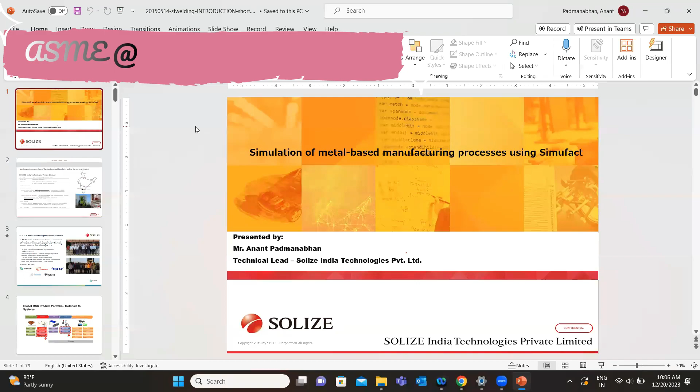Once again, welcome to the session and very good morning to all. My name is Anant Padmanabhan and I'm handling the technical team at Solize India Technologies. Our topic of today's discussion would be simulation of metal-based manufacturing processes using the software called Simufact.

To start with, I will give a brief introduction about the company Solize India Technologies, followed by Simufact, and then we'll move into the software related discussion. So basically, what is Solize India Technologies? We are services and solution providers in CAD solutions as well as CAE solutions all over the country.

If you talk about CAD or PLM technology distribution, we are a leading partner with Dassault Systems India. If you know CATIA or 3D Experience technologies, we are the solution providers for these CAD and PLM related technologies. Coming to CAE technology distribution, we are the partner with MSC Software, which right now is under the company called Hexagon, and VA Grade.

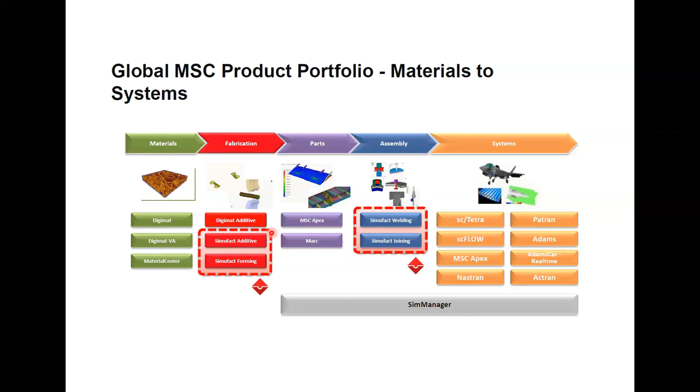We'll start with the introduction to the Simufact software, which is mainly used for metal-based manufacturing solutions, an end-to-end solution for metal-based manufacturing simulation. It can be in the forming or forging domain, additive manufacturing domain, or joining processes like welding, and so on and so forth.

So how did the Simufact software come into the picture for manufacturing simulation? Simufact is basically a German based solution, a German company. As the word, Simufact stands for simulating manufacturing, these two words. It is basically supporting metal-based manufacturing processes, and it is a very manufacturing-oriented process simulation.

It was headquartered in Hamburg, Germany, where the development of this solution started. Technology-wise, it is using the well-known solvers like MSC Marc and MSC Dytran solvers, which work in the back end behind Simufact for solving complex multi-physics as well as multi-structural problems.

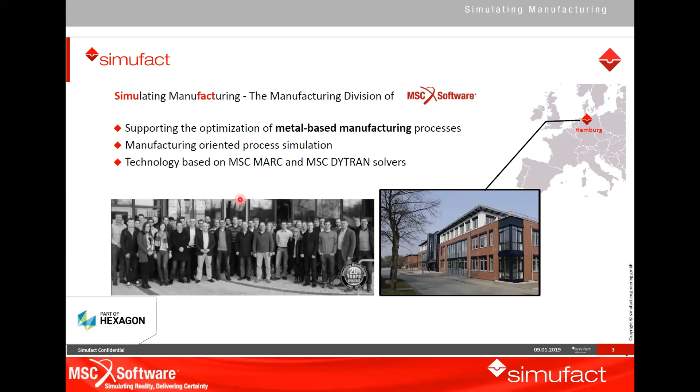Simufact was founded in 1995, and as I explained, it was headquartered in Germany, and it offers solutions for a large number of manufacturing processes in the metalworking industry. It provides software products and services for optimization of manufacturing techniques by means of process simulation. In 2015, it got acquired by the MSC Software company, which is part of Hexagon.

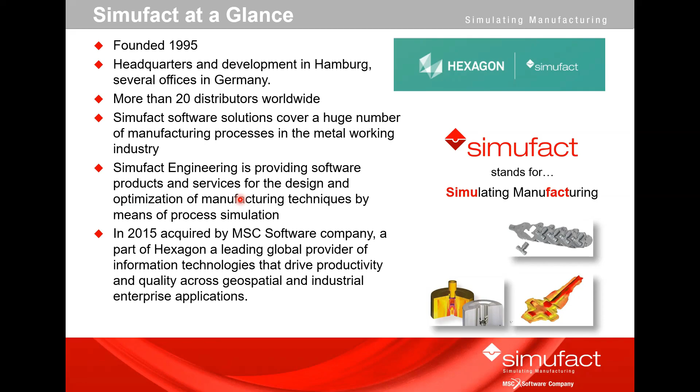Hexagon is a global provider of information technologies that drive productivity and quality across geospatial and industrial enterprise applications. So all these things come under the solution provider called Hexagon, which handles these solutions. We come under the Manufacturing Intelligence division of Hexagon. Simufact is a part of this technology provider.

At a glance, when we look at the Simufact product or solution provider, we broadly classify our solutions into forming domain, additive manufacturing domain, and welding domain.

In forming domain, what are the different analyses or processes we can perform? We can perform cold forming, hot forging, sheet metal forming, or any rolling processes, ring rolling processes. It can be pressure welding or heat treatment processes. So all these processes we'll be able to perform under the module called Simufact Forming.

Coming to welding, we can do arc welding processes, laser beam welding processes, electron beam welding, and brazing simulations, as well as for automotive customers, resistance spot welding simulations. And there is direct energy deposition, DED process, which is a deposition method based on arc or laser based deposition processes.

So this is some kind of additive manufacturing process, but we use the welding technology to perform additive manufacturing. It can be arc based or laser based, like cladding, laser based cladding, or arc based deposition process, which they call the DED process, direct energy deposition.

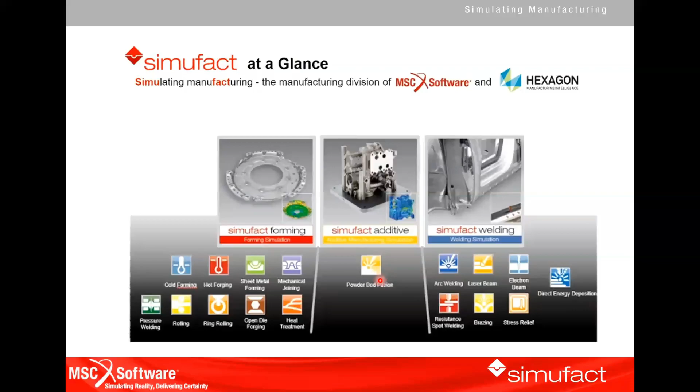So this is Simufact at a glance. Now let us deep dive into Simufact further, like what is Simufact welding, what is Simufact forming, and what is Simufact additive actually. So today we'll be covering the welding aspects followed by the forming, and tomorrow we'll be having a session on Simufact additive manufacturing.

So let me start with an overview of Simufact welding, and we shall see some case studies, followed by a demo of the software. So we'll see how it goes actually.

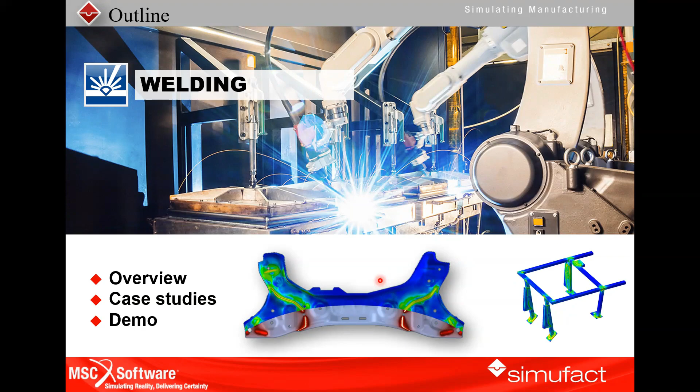Coming to the overview, like how Simufact welding came into the picture, or why such a software or technology is required in the manufacturing industries - the idea was born from 5 of these top OEMs like BMW, Audi, and other OEMs. They wanted a solution to make the simulation process much easier for them. Basically these are all FE related technologies, finite element based technologies, but how can we make the finite element technology easy for the user - someone who might be a design person or a shop floor person working in the industry, who might not be aware of finite element technologies. So that was the idea of starting a simulation software for manufacturing people.

So in the sense, the software should be innovative and it should be user friendly too. That is the main aspect. Any person working in the industry should be able to understand and should be able to easily set up his process in the software and then find solutions for his problems actually. Okay, that was the idea.

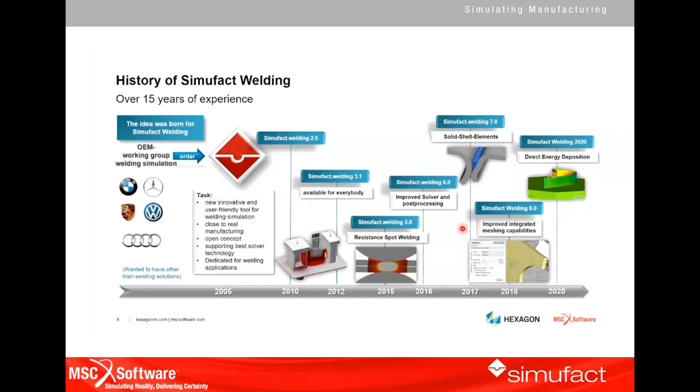Then over the years, it started in 2005. Over the years it started evolving and new technologies started coming into the picture, like they started with arc welding, laser beam welding, then they started introducing resistance spot welding technology, followed by some improved GUI based applications to the software, so the user will get a direct feel - if the GUI based application is there, we'll be able to easily set up our models inside the user interface. Then direct energy deposition, when deposition technologies or additive manufacturing came into the picture, they started developing this kind of technology into the software actually. So this is the basic overview of Simufact welding, how it came into the picture.

Now coming to manufacturing, what are the problems mainly faced by manufacturers? It can be joining technologies or forming technologies - for example, to design and optimize the welding strategy and how to reduce weld distortions actually. So in industries they might face these problems on a daily basis. So how to overcome these kind of problems actually?

It can be by identifying the best welding process, or optimizing our fixtures or the clamping concepts - it can be geometry based or time dependent force, or time based release, force or stiffness aspects which come into the clampings. Or optimize the order of the welding path - welding trajectories or welding path based on the sequence of welding, how it can affect our distortions actually. And it can be optimizing the heat source parameters.

So all these aspects come into the picture when we are doing a welding process, and how we can overcome welding distortions and other related problems by optimizing these parameters, to calculate residual stresses on the components. Residual stresses can be a major issue when we are talking about welding processes, and understanding how weld

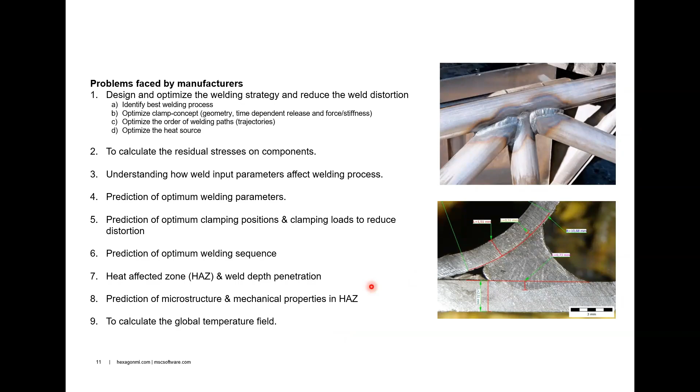So 8 good reasons to employ Simufact Welding. First would be to identify any critical distortions in the components or in the assemblies, to investigate clamp tools, to investigate the welding directions and welding sequence, to investigate the influence of unclamping and weld distortions and residual stresses.

And development of heat affected zone, and then planning of welding processes. Then all these aspects, if we are dealing with any of these kind of aspects, we can employ software like Simufact Welding for our applications.

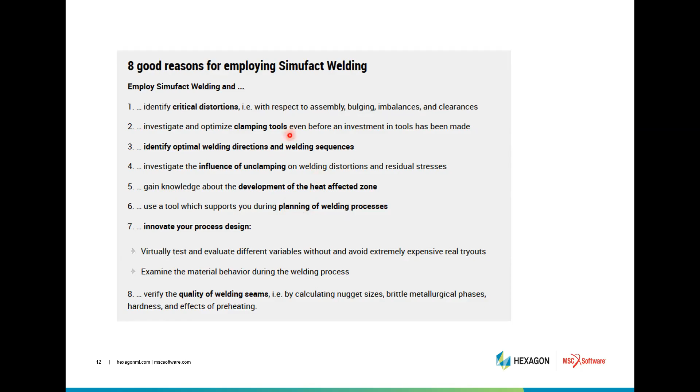So what is the basic agenda? It can be, you can say, saving time and money by testing our processes in a virtual environment. So basically in the industries, they spend a lot of effort in testing and trial and error methods to arrive at optimum parameters.

So if we are able to reduce our shop floor tryouts or the real testing which is going on, we can employ these kind of simulation technologies during the design process. During our design process, we can verify our design before the trials, or before going for a test, to identify any possible problems which can happen, or test new designs which are usually not tested because of

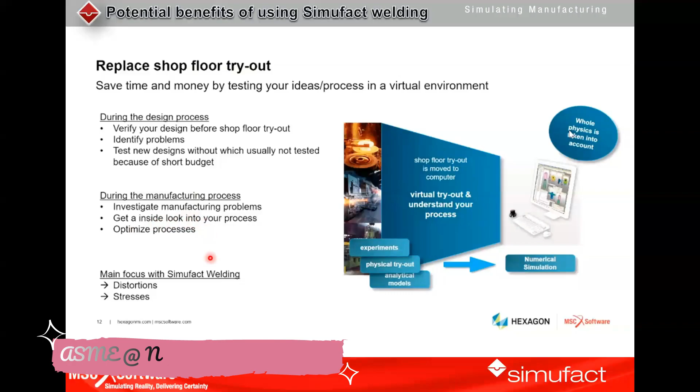short budgets. Then during the manufacturing process, to investigate any manufacturing related issues, to get an inside look of our process and to optimize. So the main focus would be the distortions and study on stresses which can happen during the process.

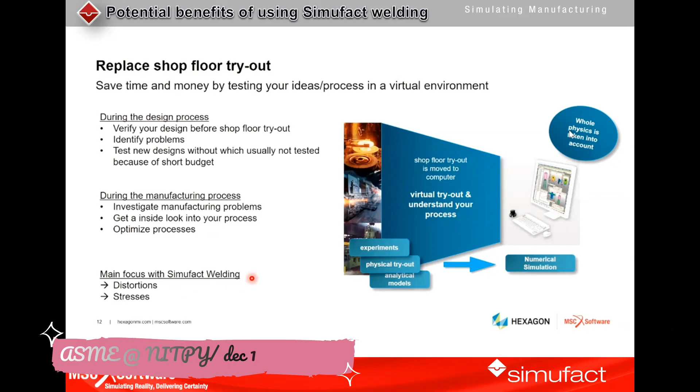So here we can see an example, like multiple ways to use Simufact Welding in our simulations to find our way and to overcome some kind of challenges. So mainly here you can see a component.

So studying the influence of different weld sequences. Based on different weld sequences, you can see the first weld sequence here, starting with 1, 2, 3 and 4. So this was the first weld sequence in which the welding was done for this component. And then we will follow another weld sequence like 1, 2, 3 and 4.

So these different sequences or different trials will give out different outputs. It can be with respect to distortions, or with respect to the residual stresses outputs. So mainly if we employ these kind of different welding strategies, we can see our distortions will vary drastically. Here you can see distortion is around 1.04 mm. It has come down to 0.75 mm just by changing our welding strategy or welding sequence.

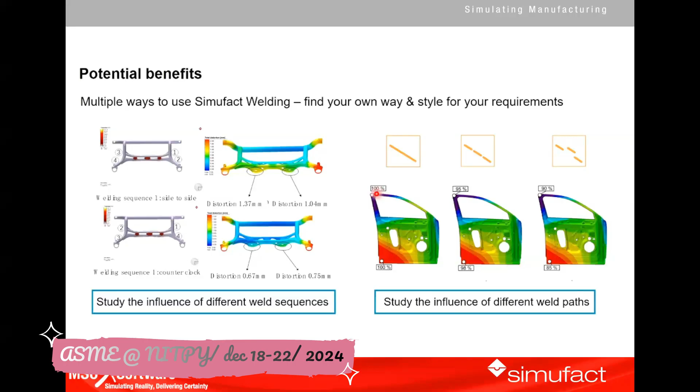And also we can study sequence for different weld paths. For example, this is a car door assembly which is welded. Here you can see if you use a continuous weld, a discontinuous weld, or a staggered weld like this, how the distortions at the end can vary. Even though the pattern is the same, the magnitude of the distortions might be different. So these kind of studies can be very much successfully done using the Simufact Welding software.

And another case study here we have, studying the influence of different clamping positions. So this is like a finite element model of components, and here we can see the clamps which are there on the components. So these clamping geometries have an influence on the welding results.

For example, if we change the clamp locations, here you can see they have placed an extra clamp to reduce the distortions at that particular area. So we are able to reduce the distortion at that particular location. This used different CAD based geometry, based on experience or simulation based results, and using simulation results to adjust the clamping positions. So these kinds of studies also can be done using Simufact.

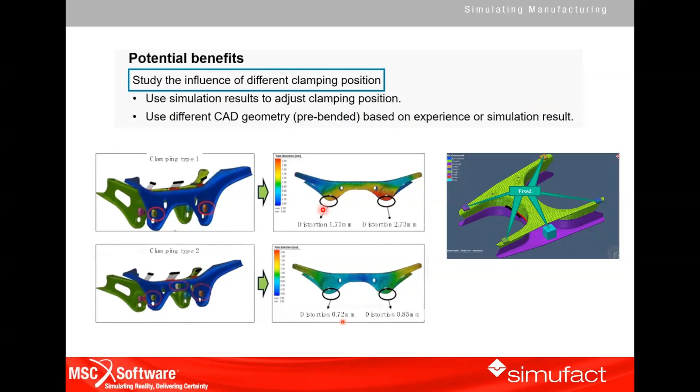Then we may have components where we have different welding directions we want, welding sequences, pre-bowing effects we want to incorporate, and number of welders and heat input. So there are different parameters that will be there.

Out of these different parameters, how do we find out the best parameter? It can be using 2 robots or 1 robot, using the pre-bowing effects, or using some kind of reverse welding technologies, or changing the welding trajectories. So for this kind of trial and error, we can very much use the software platform to do that.

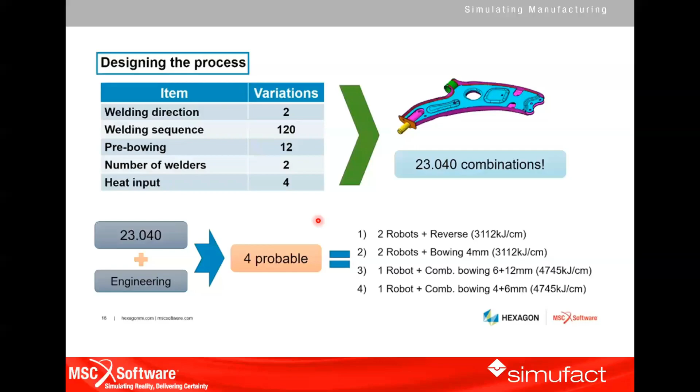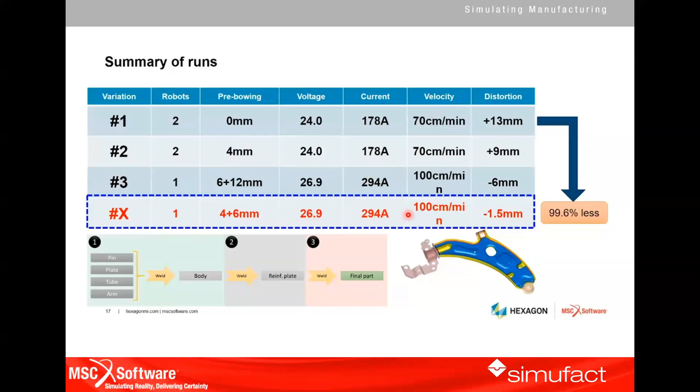So further deep diving into some case studies with respect to Simufact forming and welding, the first one would be a motorcycle swing arm. That is a sheet metal kind of part, and then we have arc based welding, and we have the heat source optimization here. So this will be the welding setup.

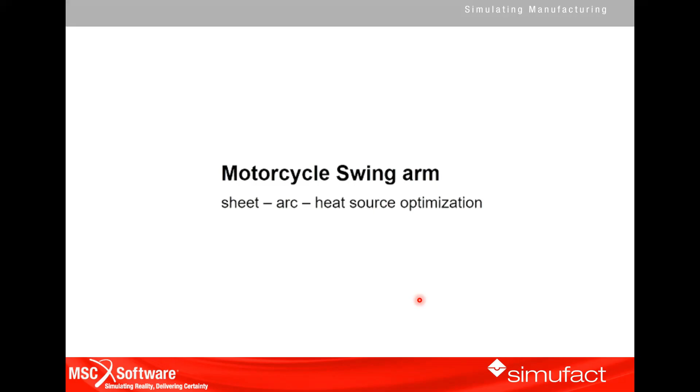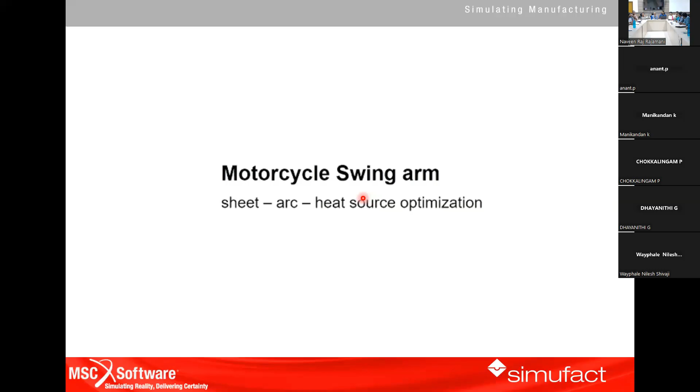This component, exactly where is it used? What is the function of this component? This component, I think sir, it's a bike motorcycle swing arm. What is a swing arm? I think it's a suspension kind of component that comes in the motorcycle - it's the rear wheel holder. Yeah, that's great.

Rear suspension. Yes, motorcycles, we can find it. And this also, how do you look at it from the functional side, whether the distortion caused because of welding is allowed or not allowed. Suppose it's going to catch both sides of the wheel axles - the distortion at this point is going to be critical, but in between, distortion is not going to bother much. From the distortion point of view, can you go back to this point...

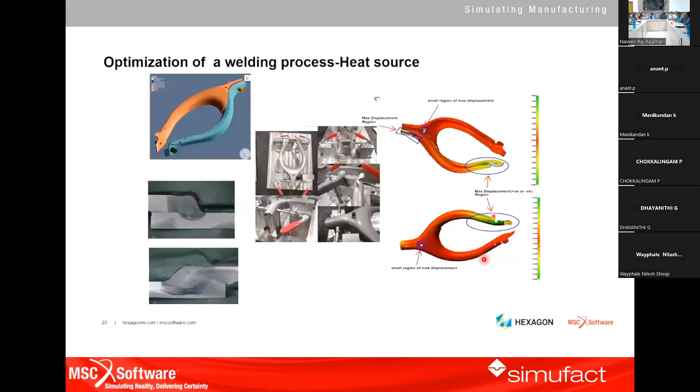Which point is the distortion you are aiming to reduce? Here, distortion was found to be at this location, but that is not the very important zone. No? The ends are probably where it's going to hold, yeah, during the function aspect.

So does the distortion at that point matter? Maybe because they might be aiming at some accepted tolerance values after the welding and cooling is done. They might be interested in reducing the distortion at that particular location so that they get the component within tolerance. So after that, if you fix it in the fixtures, the distortion might change - that may need further analysis, actually structural analysis.

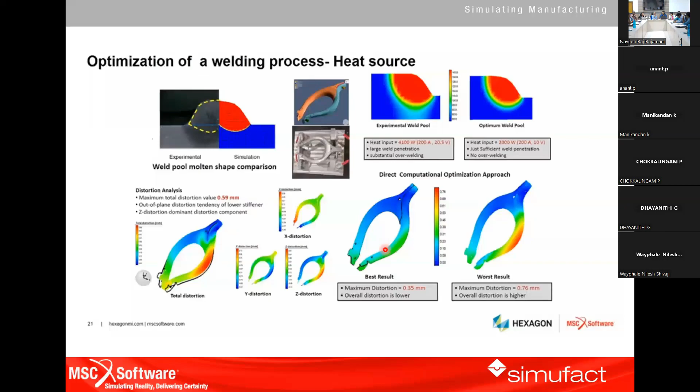So we can check the mechanical properties also by using Simufact - mechanical properties like tensile. Yes, for that we might need some multi-phase properties, then we can do that - like tensile strength, stress, those kinds of properties we can check.

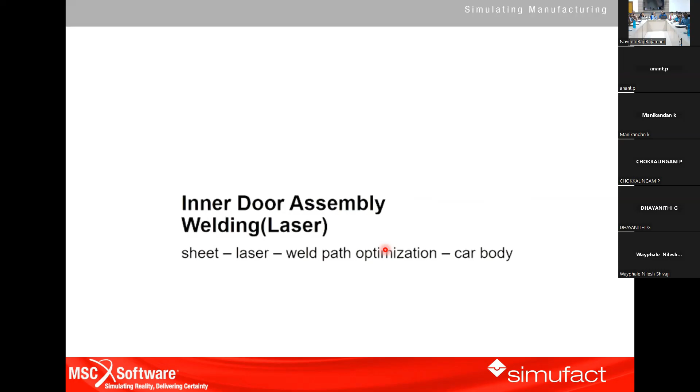And then comes the next study, that is inner door assembly welding, okay. So this is a laser-based welding process. Here you can see the car door assembly - normally this door assembly is done by spot welding. Okay, how is laser welding going to help? Laser welding is normally going to be very, very high temperature when compared to spot welding.

So why have they gone to laser welding instead of typical spot welding? Yeah, I think for specific regions they may follow laser-based welding - some components, a few components, they'll do that for.

It's only a small portion, a small region over here. I think spot welding might not be feasible at that particular location, so that's why they're using continuous welding.

To my knowledge, in door panels we are using Tailor Welded Blanks with different thickness materials. Sometimes one side will be 1.6 mm, another side will be 2 mm. For that, it's very difficult to go with spot welding. Also, we are making a butt joint, not a lap joint, so butt joint is very difficult or impossible with resistance spot welding.

There are a few symptoms why we are going with this, and I'll come back to you. You can see it's not only for Tailor Welded Blank, it's not restricted only to thickness. It's also with different types of material you have.

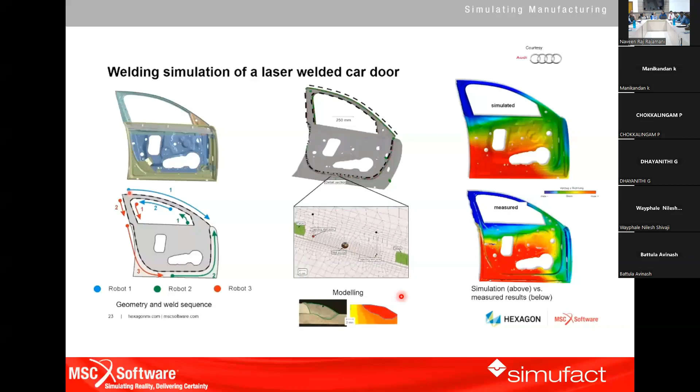This study was done for different influence of distortion based on different weld seam approaches, like if you use a continuous approach, a discontinuous approach, or a staggered approach, what can be the specific outcomes of these. So this study has been done.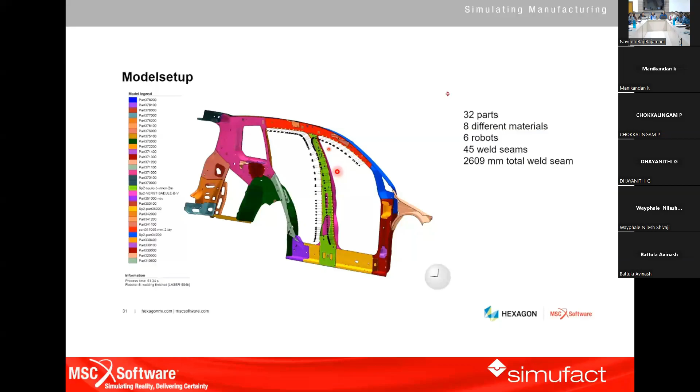And you can see the trajectories being modeled inside the software, and how the simulation setup is done for this section. So this shows the software GUI, gives a brief glimpse of how it looks like.

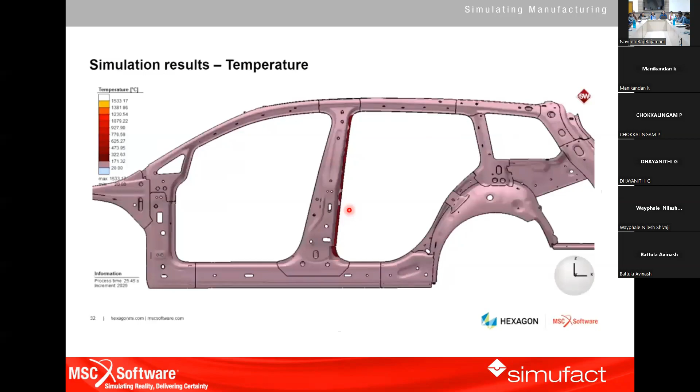When we do the process increment or time wise, we can see the heat distribution or the temperature distribution on the part, how it happens when the welding process is done. And then we can study distortions which are happening due to all these parameters - it can be the welding, different robot sequences, different heat input parameters. All those things combined give you the end output - it can be the total distortion happening on the B pillar assembly.

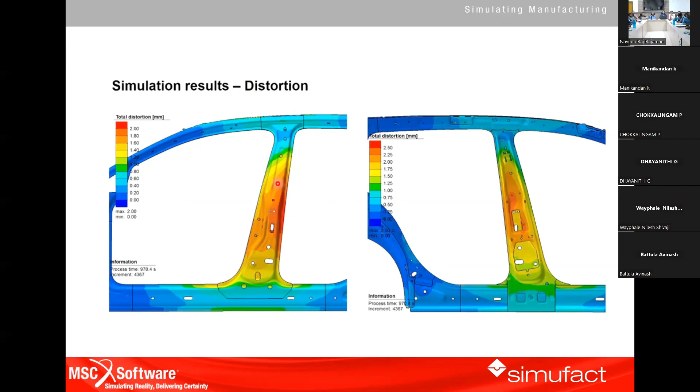Then another thing is the process chain simulation of a part. So what we are doing here is predicting the distortion due to welding with Simufact Welding, and prediction of residual stresses and distribution due to metal forming.

They have formed this part using forming, and after forming this part, they are trying to perform the welding. So we have different manufacturing processes which are done to arrive at this part.

So how do we do multiple processes? First we have to do a forming simulation, then we have to do the welding. And how can we capture the result coming from the forming - some stresses or strains which are captured in the forming simulation - and using that history, we have to do the welding. That will create much more insight into the simulation because we are taking the history of a previous manufacturing process and then doing the welding simulation.

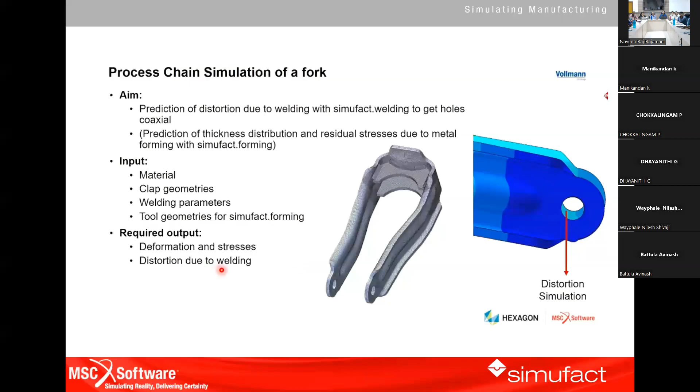Then doing a welding simulation without carrying any history from the previous forming simulation or any manufacturing process done prior to this particular process. So the outputs they were looking at were deformation, stresses and distortion due to the welding. So this was the main thing.

So this was the multi-stage forming simulation - forming simulation with some 11 forming stages. It can be starting from coining to cutting or Boolean operations, then stamping was done, then bending was done, to arrive at the final output like this. So it's something like a multi-stage forming simulation done with Simufact Forming software.

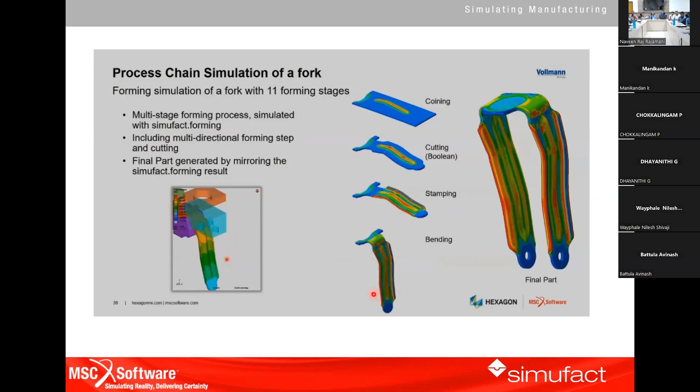Including multi-directional forming steps and cutting, then the final part generated by mirroring the forming result. So here we can see the dies or the punches and the tools which are used for the particular forming simulation. Okay, so once you form this particular part, then we take it to the welding setup like this.

So in Simufact Welding, we can get the component like this, and then we have the fixtures, the clampings, and all the other supports which you can use either directly, import from your CAD software, or use some simple geometries which you can create within Simufact to define your boundary conditions. So internally in the solver, all these things go as a boundary condition - for example, your clamping fixture, your clamping forces. All these things will be going as a boundary condition inside the Simufact software.

So parts are assembled in the manufactured configuration - as per the manufacturing configuration, we are trying to assemble the fixtures along with the part, along with the component. The setup, the assembly and clamping with large displacement can be done with Simufact Welding. So after assembling this part, defining our parameters, defining our weld trajectories and weld path, we will do the welding simulation.

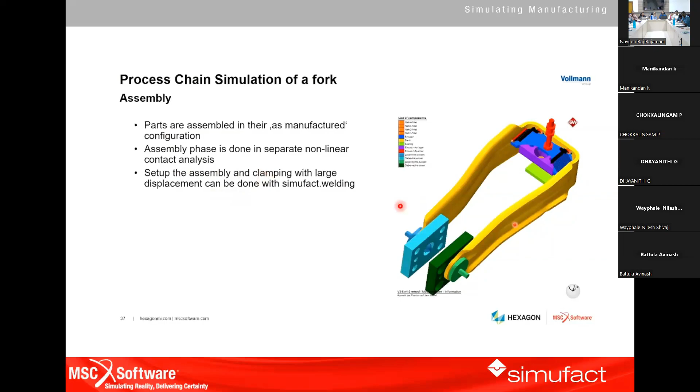So for the welding simulation, for example, if you do a welding simulation without the forming history and with the forming history actually. From the forming history, some residuals result which is coming from the forming will be taken into the welding actually.

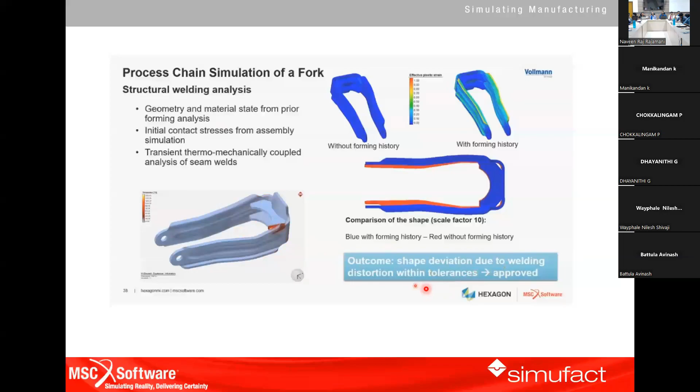So this will show us a brief overview on the welding, how it is done. And we can study, they have studied the shape deviation due to welding distortions within the tolerances.

And then there is another case study for motorcycle bike frame. So this was also done for the bike frame component here. So here we can see the heat affected zone or the fusion zone, which is in the software we can get these results in such plots actually. The red area showing the fusion or the melting zone. It can be studied in the software by using the simulation.

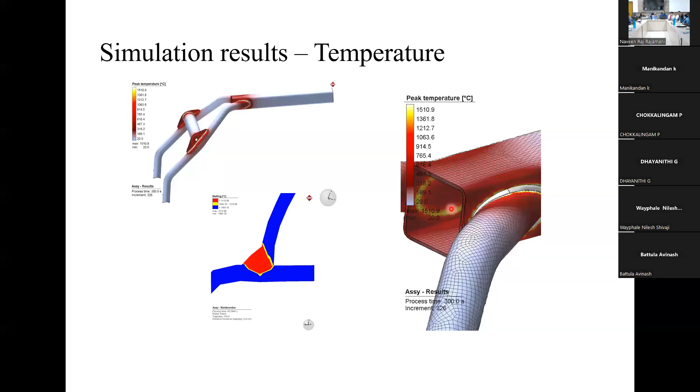And here it shows a peak temperature output after the welding is done. So this shows the meshed component here, the finite element model, which is being meshed and it is showing the result.

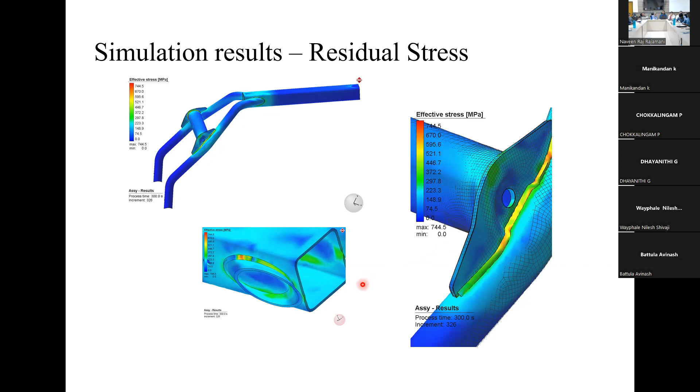This shows a result for the stresses which are coming in the components. It can be residual stresses after the welding is done. And we can study the different effects due to residual stresses in the component after the welding.

Then comes the distortion results. We can see the results due to distortion after the welding is done. So we can see the initial configuration and final configuration after we perform the welding analysis.

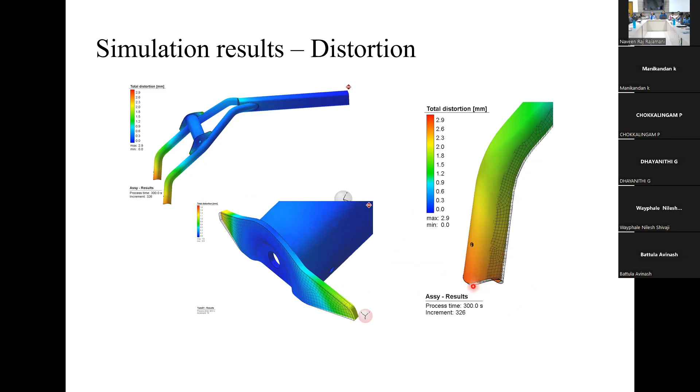Next capability, like spot welding. So resistance spot welding. This is also a major capability for the automotive OEMs. So OEMs like Bajaj and BMW or these kind of OEMs are using the simufact software to optimize their spot welding aspects.

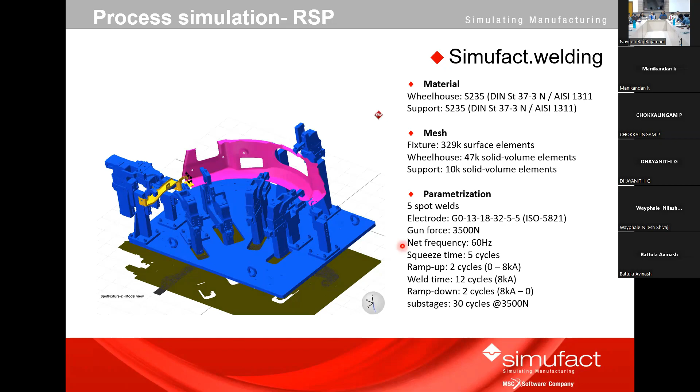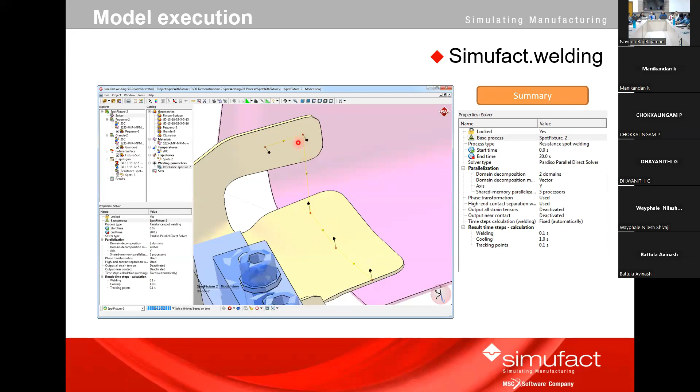So once this shows a brief overview on the GUI part, how it looks like. While showing the demo, I'll give an overview of the GUI. So if you can see the different spots, locations here where the spot welding needs to be done. So we are modeling the trajectories and then the weld sequence in the component.

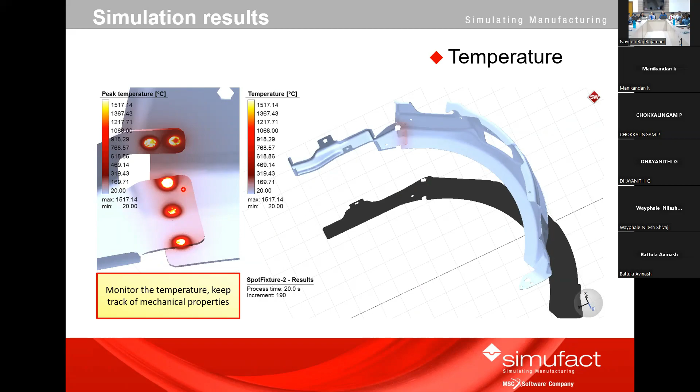So this shows the temperature output. Here we can see we are monitoring the temperature, keeping a track of the properties basically. So this will give a clear indication like whether the temperature is sufficient or whether we have to increase our parameters to get the correct fusion at that particular area.

Then we can also see different fractions of phase transformations happening, like fraction of martensite. You can see the martensite spots, making sure that it will have a stronger bond at those locations. So these are some metallurgical aspects where we can monitor to get a correct idea on the process.

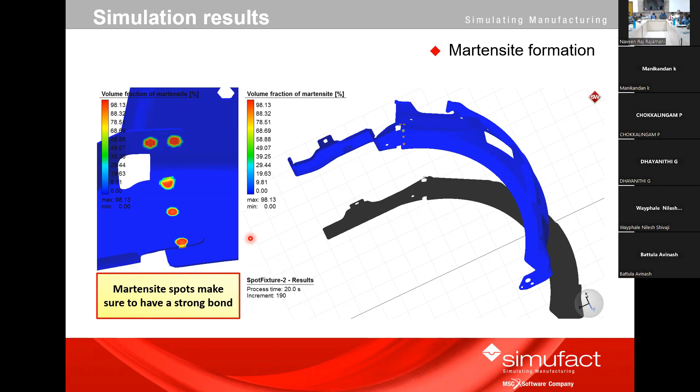And coming to the mechanical aspect, like stress levels, it is about selection of the spot sequence. So whether the chosen spot sequence will give us the correct distortion or the residual stress outputs that we want or not, we will get an idea from results like these. Then comes distortion.

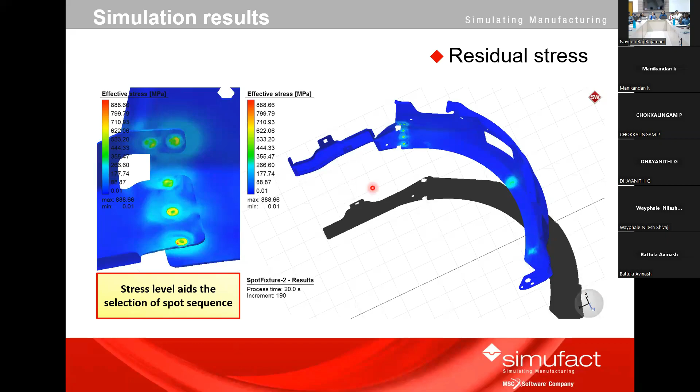So distortion is another main aspect, controlling the distortion level. We can see the spot when we are doing like this, there are some local distortions which are coming at that particular area. So how we can reduce this kind of distortion, whether we have to change our fixtures or whether we have to modify our parameters in the welding. So these kind of studies can be made.

So this shows all the results that we can get from the welding simulation. It can be thermal result, or it can be metallurgical result. It can be a stress result, or it can be a distortion result. So this shows a result in all the different aspects.

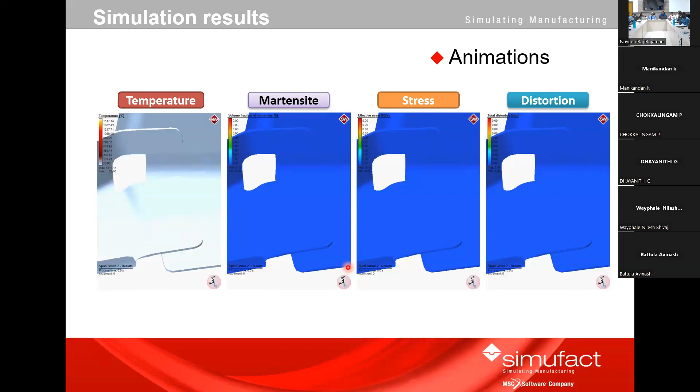I have one doubt - apart from these things, is there any defects we can identify using your simulation, sir? Like cracks, can we identify those? Yeah, cracks can be identified based on our stress outputs using Simufact, sir. Apart from that, we don't consider other defects.

Yes sir, that's why I'm asking. Welding defects, mainly we can make out cracks - this might happen wherever the stresses, like residual stresses, are coming concentrated. We can study the principal stresses or tensile stresses. Wherever tensile stresses are coming, there can be possible reasons for cracks at the weldment region. Those kinds of things can be studied.

It cannot predict porosity and all that, right? Porosity and all we cannot study. Chemical aspects, those kinds of things we cannot study.

I want to know which type of heat source is used in this. For heat source modeling, we can use a double ellipsoidal Goldak heat source model. And for laser, we have the beam heat source model available - Gaussian conical heat source as well as the cylindrical heat source we can model.

And there are certain advanced capabilities like using subroutines - we can develop our own heat source. That kind of capability can be put inside the software to define our own heat source if we want to model it. We can make use of user subroutines to do that.

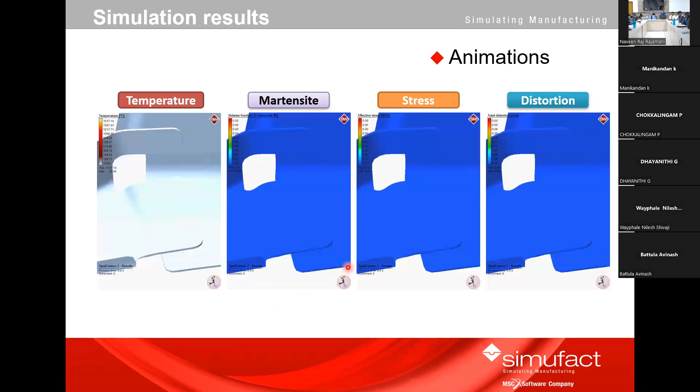So coming further, what they found out here is they were having some distortion problems happening. So they tried out different fixtures to optimize the fixtures.

So what they felt is some of the fixtures might not be necessary for this process. So they tried to optimize the fixtures and reduce the number of fixtures, which can reduce the total weight of the assembly as well as reduce the distortion based on the location of these fixtures.

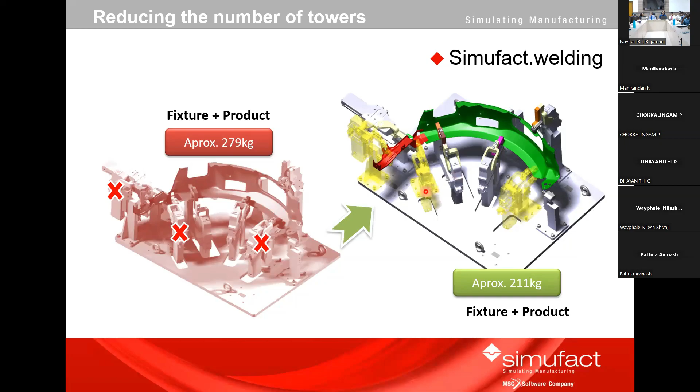So before that, we can see these yellow fixtures are there - they tried to remove them and did the analysis with the other fixtures in the component. So the yellow ones were cancelled from the process. In that way, after that, the total distortion was reduced. Distortion got reduced by 70%, and the fixture weight of the assembly also got reduced by 25%. So this was for the spot welding.

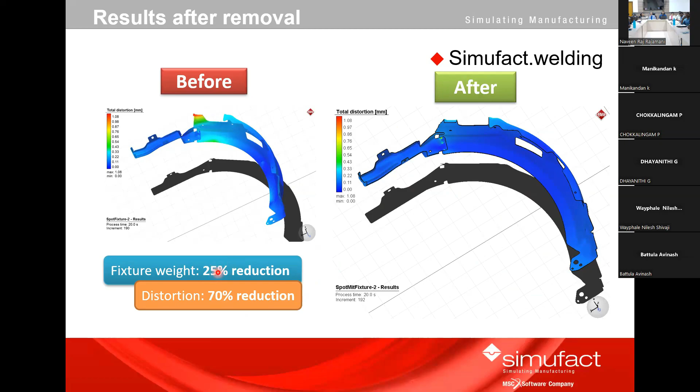So this will show a brief idea of how the spot welding things are done. This is a pillar where the spots are getting done in the simulation.

This shows different results - whatever we saw earlier, like displacement or stress results. We don't have to wait for the entire result to complete. We can see the intermediate result as the process is going on, viewed in the GUI.

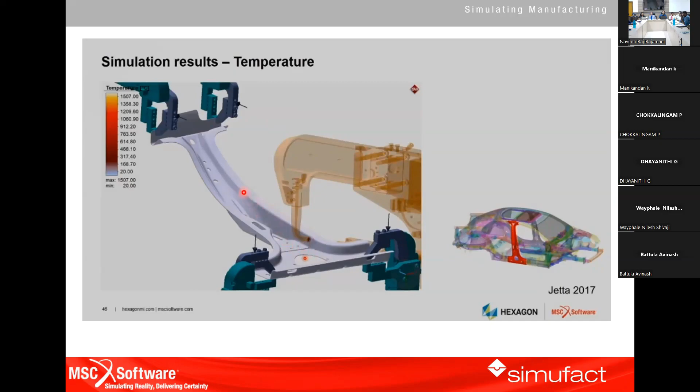For example, the first weld is done - we don't have to wait for the entire process to complete. So that intermediate result viewing is available in the GUI, which I'll be showing in a while.

So this shows a rear muffler bracket case study. You can see a customer actually shared the CAD model - for example, they are having the CAD model with them.

They want to perform the simulation using Simufact Welding.

This is something like a MIG welding, and these are the materials being used - ASTM standard for these two materials, and the weld filler with its DIN standard. You can also see the welding parameters like current, voltage, weld velocity, the number of robots, and welding duration. All these are the inputs needed inside the software.

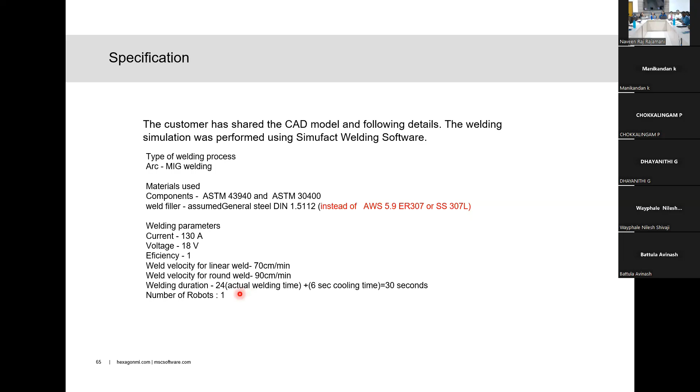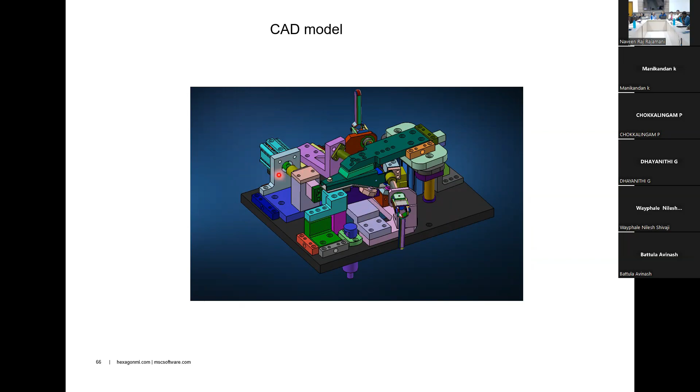So you get a whole entire assembly like this, but we need not take the entire assembly for our analysis. What we need is the component along with the fixtures for the clamps. There are some 'bearings' which are something like a fixture.

It is not like a bearing component that we normally understand. In Simufact, bearing means something like a table or support on which the component is kept for welding. So we need all the fixtures for our analysis.

We need all the clamping geometries that we have modeled or are going to model, along with the component to be welded. You can see a bolt kind of thing here, and two other components. These two components will be welded, and this will be welded by a circular weld - this is the detail of the model.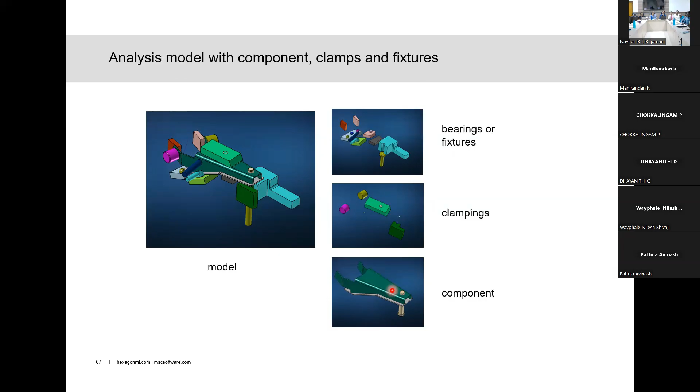So this CAD model has been imported, and we have segregated all the geometries needed for our analysis. The next step is meshing this component. In the back end, it is a finite element based modeling, so the finite element model for the assembly is generated using the MSC Apex software.

Here we created the mesh for our component for welding, and here you can design your weld filler geometry - either inside MSC Apex or inside Simufact Welding itself. Both can be used for creating your filler or weldment, the 3D weldment. This shows a meshed model of the assembly within the component.

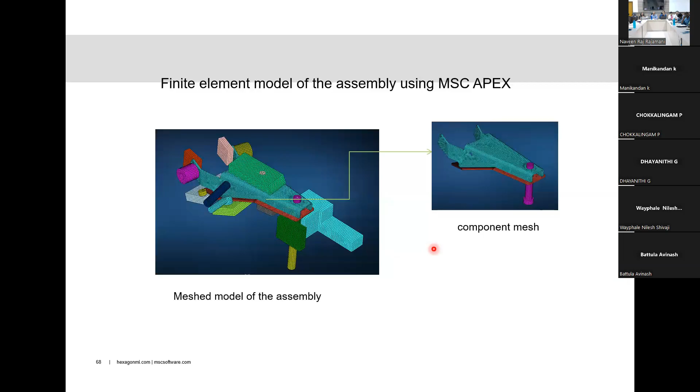So this will look something like this once we set it up inside the Simufact software - these will be your components supported by all the fixtures and clampings. These arrows show the clamping direction: one clamp here, another clamp held on the back side, and then a clamp held together in the front area.

Then all these arrows and what is shown here are the weld trajectories - the trajectory direction, weld path, and the angle of the robot, all defined here inside the weld trajectory.

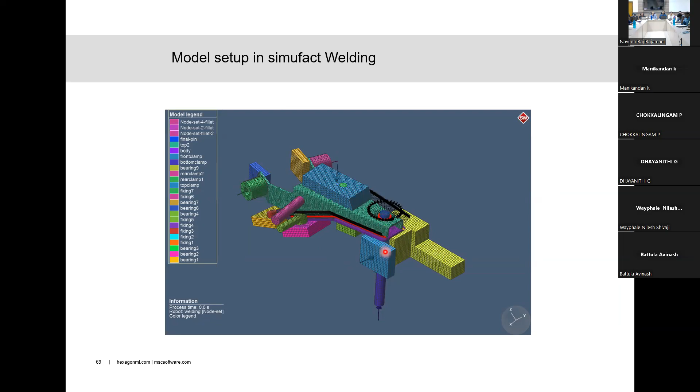This shows the clamping sequence - here you have one clamping, and another clamping on the top, along with some fixtures. This shows the sequence of the weld direction and weld sequence.

So sequence one will be a straight weld of this component from here to here, around 110 mm. Then another weld of about 115 mm from here to here. And then there will be a circular weld done at the bolt location - this is the sequence of the weld.

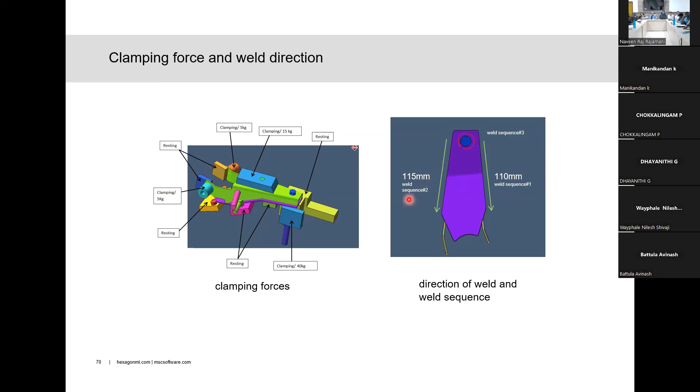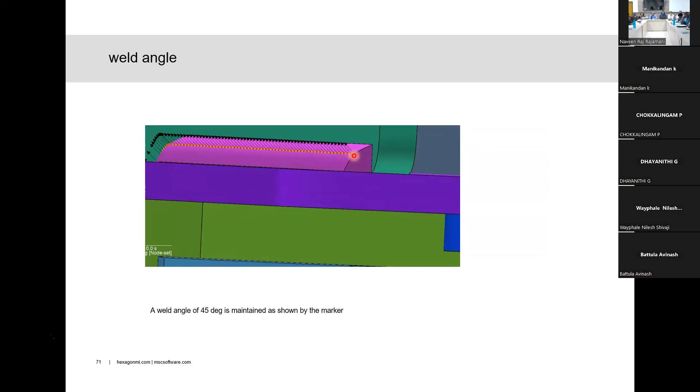So this will be the weld filler, which is modeled here. Weld filament or filler. On this, you can see the trajectory, which is modeled, having around a 45-degree angle maintained from the direction of this weld filler. This arrow shows the direction in which the robot will be held on the component during the welding operation. So this is how it will look inside the software.

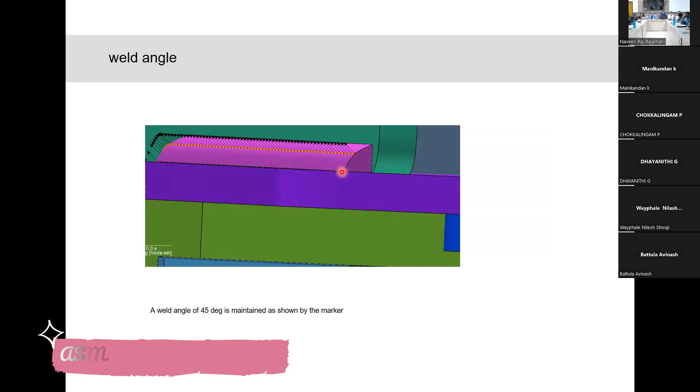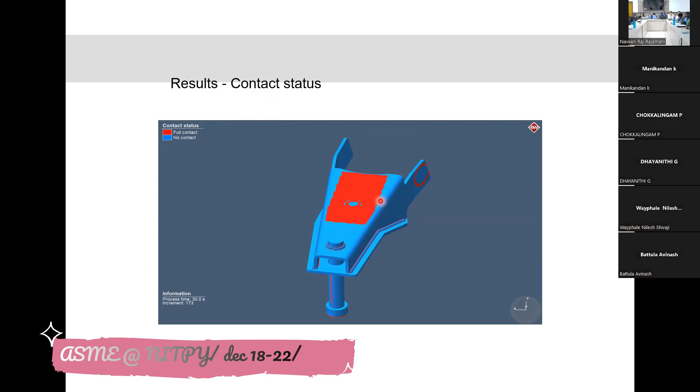So for results, as we saw earlier, additionally we can see contact status, whether all the fixtures are contacting the workpiece during the simulation, or whether some fixtures are losing contact from the components. We can analyze that using the contact status output in the software, to see whether the fixture or clamping is slipping or not.

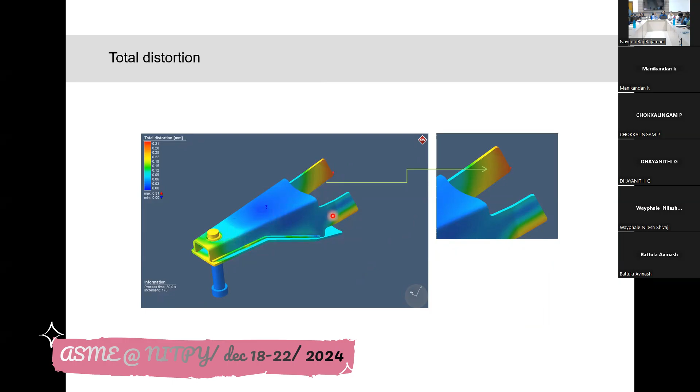Effective stresses can also be studied for the welded component. Then they show the peak temperature, which gives us an idea whether all the areas have reached the melting temperature to properly melt that particular zone. If it is not melted properly, the fusion may not happen properly in those regions. So the peak temperature output shows whether all the regions are properly melted, and the yellow or light yellow color indicates the regions getting properly melted.

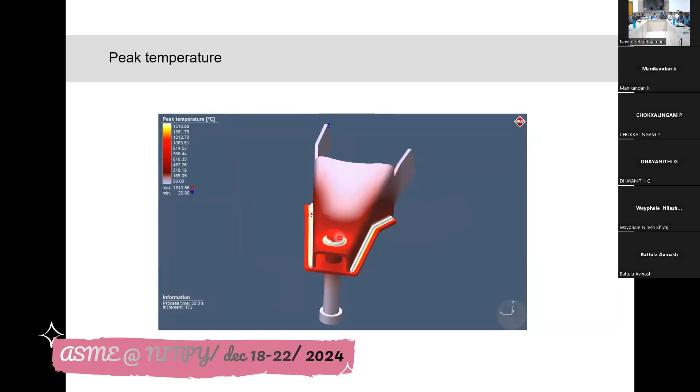Then comes the heat affected zone. Here in red, it shows the fusion areas. If more energy or power is going in than required, it may cause a burnout, penetrating inside the component through the thickness and creating more melting in that area. So we can optimize our heat source based on the melt zone or melt area to get the proper heat affected zone.

So this shows different areas. Here you can see one area where the heat is penetrating through the thickness, so maybe we have to optimize some parameters at those locations.

Then the heat is dissipated, so we can measure the heat dissipation. As the heat transfers, we can identify this using the simulation. We can get a history of the temperature at a particular location using a probe. We can measure, each time, what is the temperature output and what is the heat input going into that location. After welding, we can identify heat transfer also.

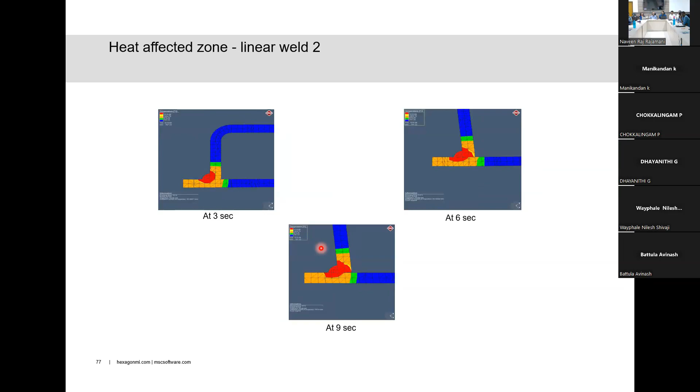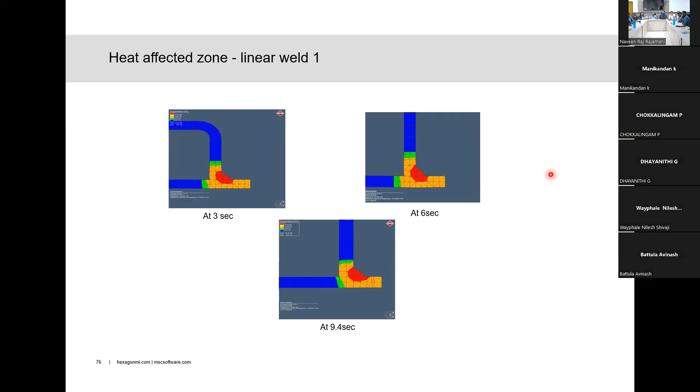The welding time - so after welding, after 3 seconds, after 6 seconds, after 9.4 seconds, how the bead profile looks, how the welding fusion is happening at different instances of time. So it's like a thermomechanical simulation that we are doing here. We are feeding in the exact welding time, clamping time, cooling time - everything we are trying to capture here.

So should we have a break or something? Yes sir, next I think most of your slides are done. Then we go for hands-on training - I'll show you a demo of the software. Yes sir, that will be carried out in the CAD lab.

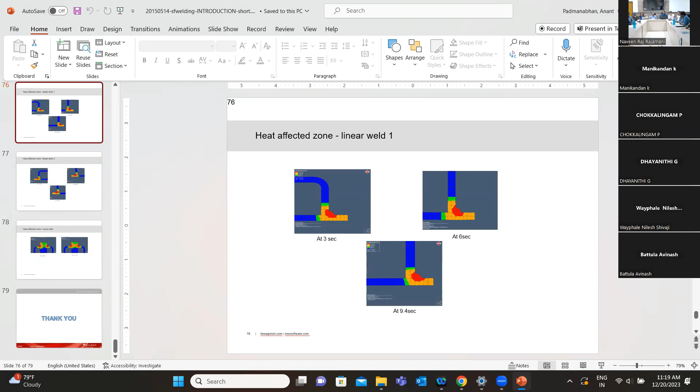And this forming thing, shall we do it now? No sir, first one lecture is over. With respect to the lecture, we'll go and have hands-on training, and in the afternoon we have one demo lecture, then after that we'll go for one more hands-on session.

Online participants, any queries? Sir, I have one doubt - after simulation, during real-time product manufacturing, do you face any issues, sir? Is the same output coming, or is there any differentiation or error? Does the company give suggestions on whether the output after simulation is better or has errors? What you're asking is what is the deviation or error occurring between the simulation and the real-time case. Yes, exactly, sir.

As this is a numerical based calculation that happens at the back end, there will always be a slight deviation from the exact experiment. So I am asking, during research also, if simulating something, in real time some differentiation is coming. How do you overcome this differentiation?